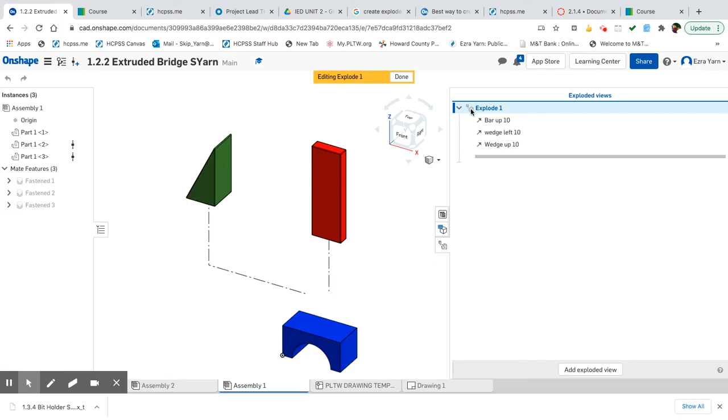All right, so when we left off, we completed assembling the item and made an exploded view. We gave it a name—ISO exploded—and we have this thing pretty much ready to go.

The next thing we need to do is make a drawing of this particular item. To make a drawing, we simply click the left-hand corner plus, then the bottom left, choose Create Drawing. I'm just going to use a regular template to speed things up rather than importing my template and wasting time there.

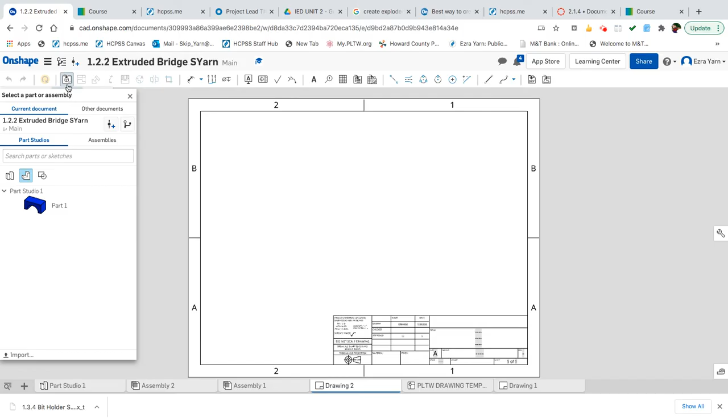When the template comes up, we'll be given the opportunity to import the item into this drawing. From the Insert menu, notice it says Import Part Studios. I'm going to choose Assemblies, and our assembly comes up here, so we can choose the assembly.

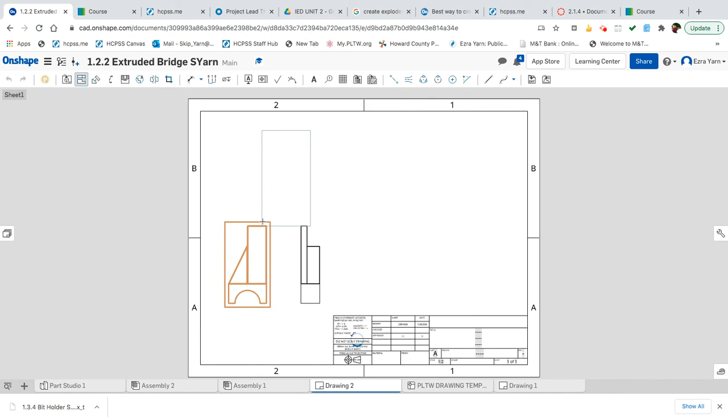Notice the default is the front. From our instructions, we know to put a front here. We will put a right side view of the object here. We'll click back on the front and put an isometric view of the item up here at the top as well. I apologize for the lag time, but we'll click on the view there as well. It's thinking—so now we have this.

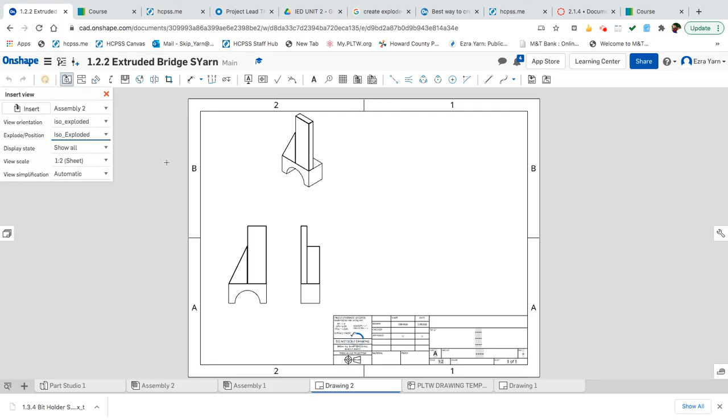The next thing we want to do is insert the exploded view. Now we gave this a name, so we'll click on the Insert button again. From Assembly 2, instead of the front view, we want to choose the isometric exploded view. The default is to have the items in the assembly view, and we're going to change the default to ISO exploded. Notice it'll come in not much larger, and we get an exploded view that we created earlier with the 3 parts, and there should be lines there as well.

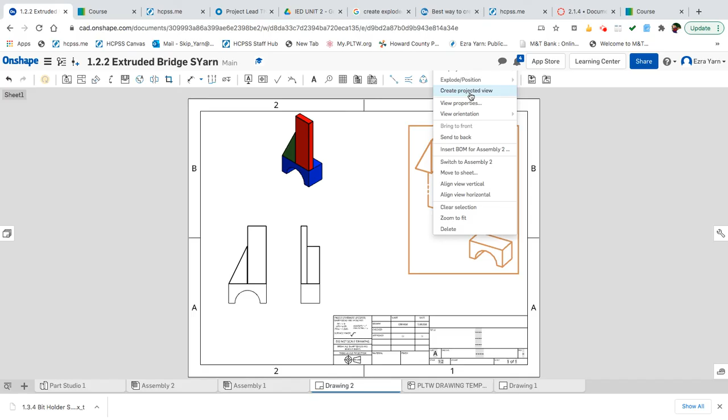I like to dress my drawings up a little bit. I'll click on Escape. We're going to right click here and say Show the Shaded View, and I'll right click over here and show the shaded view as well. That doesn't always happen, as it's way up here at the top and won't let us have access to that, so that's okay. The next thing we'll do is put in a parts list.

This button here is called a BOM, or the Bill of Materials. We click on that and it will give us a table. That table we can simply drag down and put it adjacent to the right-hand side. You'll note that we get this table from the table we created already when we did the assembly, so it's already there. The last thing we really need to do—actually there's 2 things we need to do.

We put in these callouts, often called balloons. We have to come down and click on a line. I typically try to find the center of a line of an object I'm going to be addressing and pull it off on an angle. It cannot be vertical, or should not be vertical or horizontal.

So I notice those arrows with the callouts, they match up with these parts 1, 2, 3. If we were doing a car or something and it had 4 wheels, under 1 wheel it would say the quantity is 4, and you would only need to have 1 balloon.

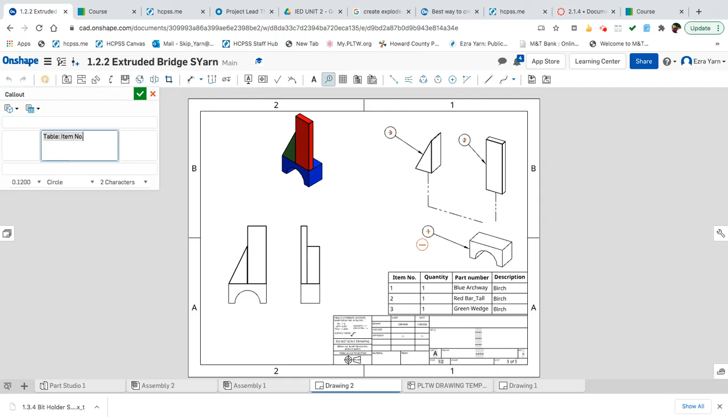The last thing we need to do here is add a note pertaining to tolerances. So we simply click on the note, and we're going to go back and take a look at the course and see what the note says: all tolerances are plus or minus 0.01 inches, parts adhered with wood glue.

I should have typed that in somewhere, but that's okay. I can go ahead and type this. Oh, everything has to be in all caps, as this is an industry standard.

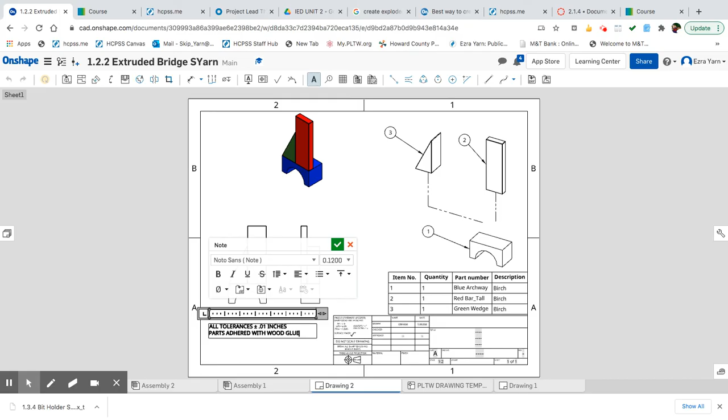And there's a symbol sign here. We're going to click on the down symbol, come down to plus or minus. This is annoying—I'll drag this out this way to give us plenty of space to type. We'll type 0.01 inches, hit return, and type in parts adhered with wood glue. Click that, and I think we're good.

We have our tolerances, we have our balloons, we have our exploded view, we have our parts list, we have a front view and a side view.

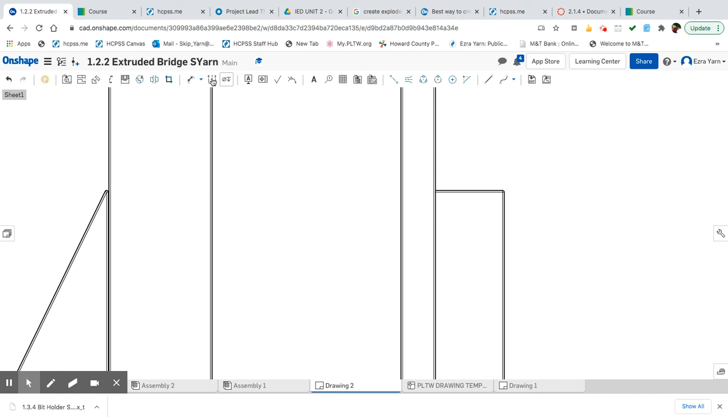One last thing we need to add here is we'll scroll in and put in some assembly dimensions. For example, we need to know the distance between this outer edge and this outer edge, and we'll simply slide that up there. We can see that we have the dimensions there. Those are assembly dimensions, not part dimensions, but dimensions relative to where the parts are located to each other in the assembly.

And that's how you complete this particular assignment. Good luck.